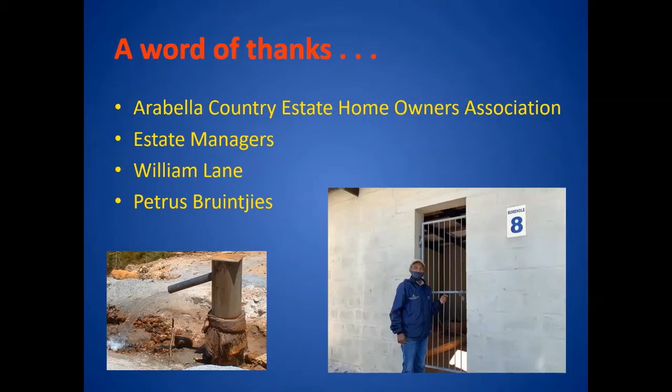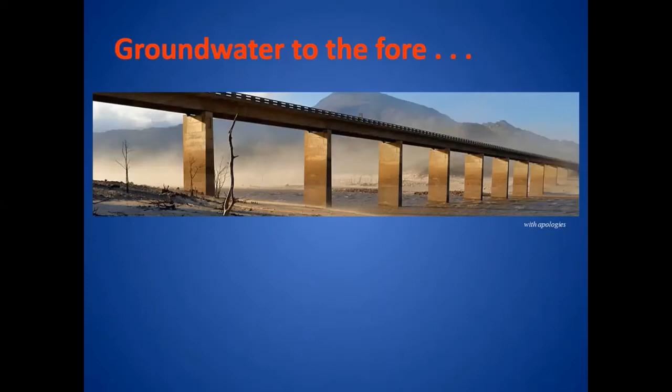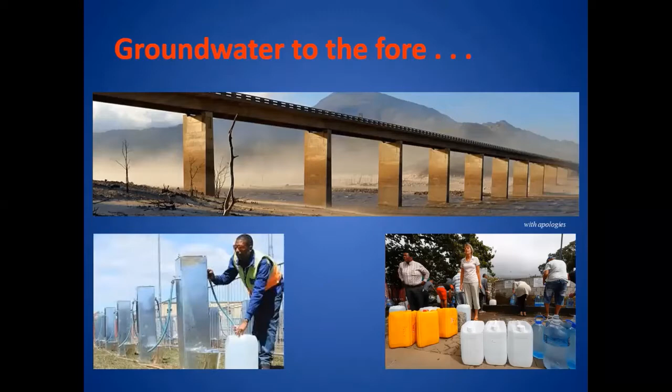This is a picture that many of you will be familiar with, but it's slowly starting to recede in our minds that not that long ago, Theewaterskloof Dam was operating at somewhere around about 13%. Cape Town was about to go into a day zero scenario. So groundwater came to the fore, and it was on everyone's lips. We were starting to think about, well, how is the population of Cape Town going to be supplied with water, and the city was talking about pods, and we had to go and fetch water in buckets and barrels and containers. And so groundwater is very much at the forefront. During that time, though, there was a lot of negative comment about groundwater, how it's an unsustainable resource and it's badly managed and so on.

And I hope what I can do today is demonstrate to you that that's not true. I'd like to put forward Arabella as a case study of where things can be done properly and where the groundwater resources can be used sustainably to the benefit of a whole lot of people.

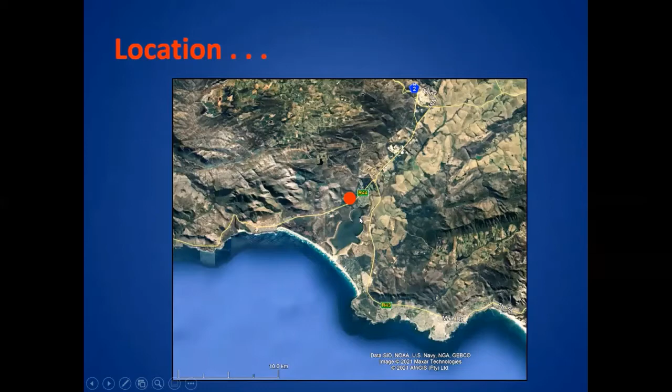So to give us a location, Arabella Country Estate is located at the end of the R44 to the east of Kleinmond, which is situated here, and to the west of Hermanus. It's located in this valley, the Bot River Valley, and this is the Bot River Lagoon that many of us drive past all the time.

And it's always amazed me how people see things differently. As a hydrogeologist, I love seeing geology, I love seeing rocks, I love seeing water and these kind of things. But other people have the vision to see a derelict piece of land and change it into this wonderful oasis. It wasn't a smooth process.

There were a couple of developers that were involved, and every so often the people we were dealing with would change, or the name of the development would change. I think it started out as Laughing Waters, then it moved on to Hermanus River Country Estate, I think, and it's been quite stable at Arabella Country Estate for the last while.

And Arabella Country Estate contains three different components. One, it's the hotel. Two, it's the golf course, and three, it's the residents that have houses in the estate. But they operate and are supplied with water from the same source.

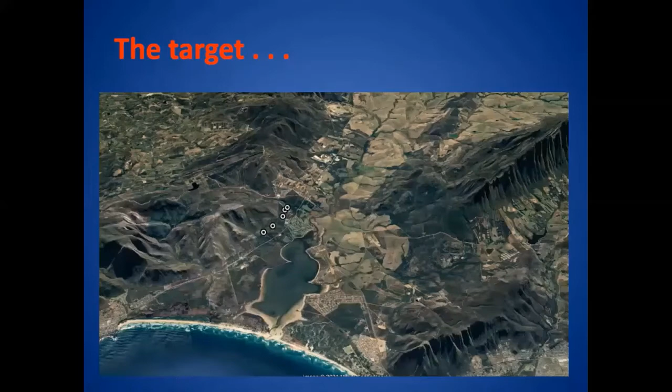All right. So what was the hydrogeological target that we were after? What I've got here is an oblique satellite image from Google Earth, where I've put in the production boreholes so that we can see exactly where we are. But if you let your mind go a little bit, you can see the ridge on the western side, and you can see the ridge on the eastern side. And you'll notice that there's very little agricultural activity on what I will show you is the Table Mountain Group.

So over that image, I draped the 1 to 250,000 geological map. And the key feature that we see is this major fault that runs here, and that is the western limb. And we see another major fault system that runs over here on the eastern side. So outside of the valley, we have Table Mountain Group, and on the inside of the valley, we have Bokkeveld. And the agricultural practice is all on the softer, more erodible and soil-rich Bokkeveld, where the water is stored in the harder, very competent quartzites of the Table Mountain Group.

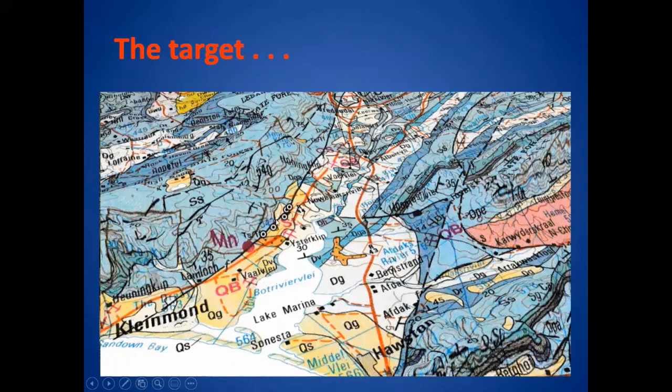So here the target that we have is this fault on the western limb of what is really a classic horst and graben structure, and we're dealing with the Skurweberg. The Skurweberg generally doesn't have a good reputation, with the idea that it's iron rich, but in recent times, more and more groundwater has been developed out of this formation, and we're learning to deal with the iron that it does contain.

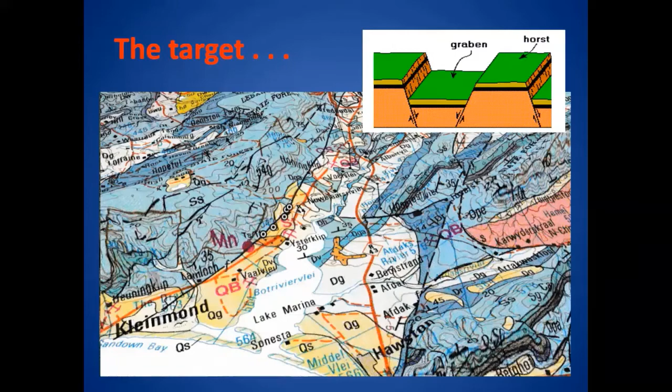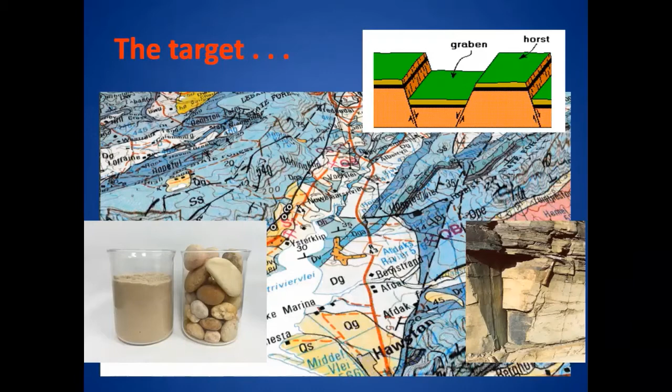Right, so just to remind us that we're not dealing with a primary aquifer system. The primary aquifer system is where water moves between the individual sand grains or cobbles or whatever, but there's no secondary processes that are required to enhance the hydrogeological properties. In this instance, we're dealing with a fractured rock aquifer, where the water moves in openings created by some sort of secondary process. In this case, faulting, but it could also be folding, it could be bedding planes, it could be weathering and so on. But here we're dealing specifically with a fault.

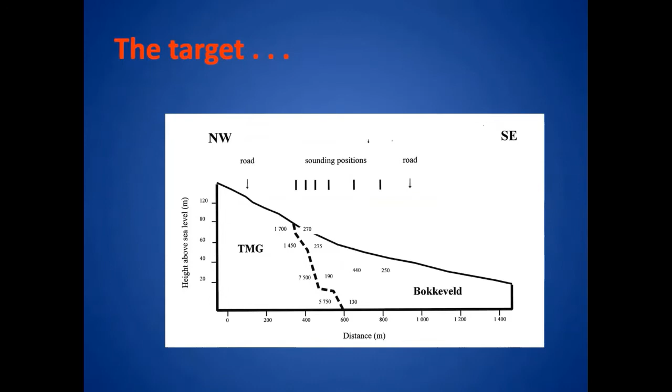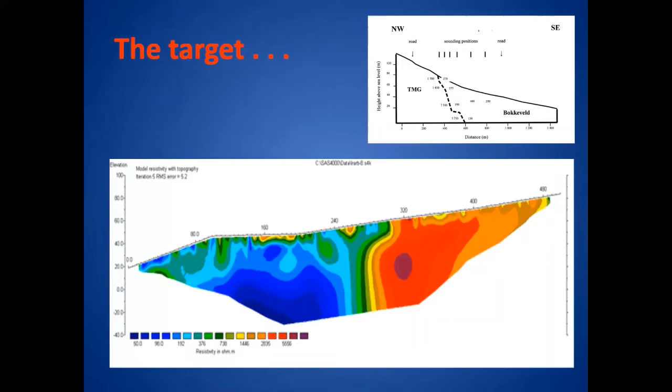But this feels a little bit like it was back in the day, because since then we've moved on to much fancier, much quicker, much better resistivity tools. So this is a traverse that is produced from a multi-electrode Lund system, and we've been using these quite routinely across Arabella to try and pinpoint the fault as our exploration grew, to get more and more water for the facility and to improve their water security.

And because of that contrast, we were quite easily able to map the fault. And we also started targeting some fracture zones that came off the fault system. And you'll see that almost all of the production boreholes target the fault. And then we went off the range on 2 occasions to drill this borehole and this borehole, which I'll explain in a moment.

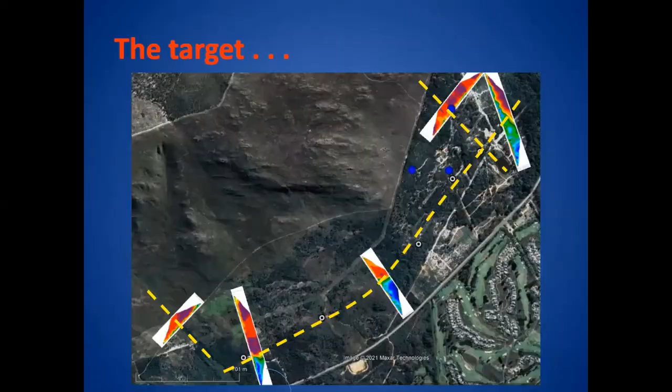All right, so the first exploration borehole was drilled in 1997. It was driven by Dr. John McStay of GIBB Africa, or whichever version it was at that stage. And he, using Fairbrother Drilling Company, put down 2 boreholes. They were quite shallow boreholes, and they were able to show that there's good groundwater resources to be had out of that fault system.

The boreholes weren't very well constructed, and we did some pump tests on them that showed that there were quite a lot of losses because of this construction. But they were the start of the process of developing a water supply for Arabella.

In 1998, we sited the first two boreholes, borehole LLBH3 and LLBH4, and from now on I'll just talk about borehole 1, 2, 3. I'll drop the LL. LL stands for Laughing Waters, which is the name of the farm. We drilled these boreholes down to about 100 meters, and both of them were what I term very high yielding, 15 to 20 liters a second.

Because we were dealing with an estate that was quite remote and didn't have any backup water supplies, the first two production boreholes that we drilled were both fitted with PVC casing with 1 millimeter slots, as shown here in the picture, and then backfilled with quite a coarse gravel. And we did this to make sure that the boreholes didn't collapse on us at some point in the future.

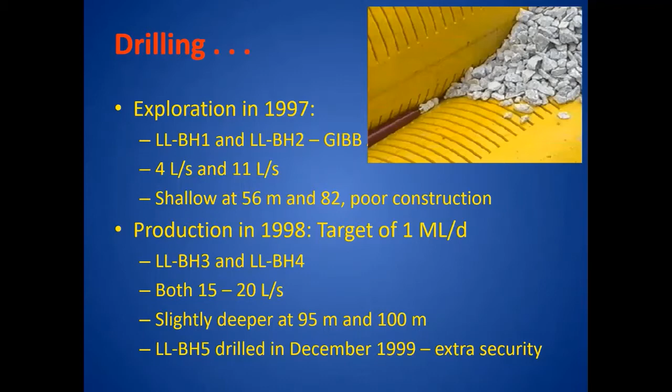And we wanted the borehole to be quite close, because one of the big expenses of any groundwater scheme is not really the drilling, but it's the pipeline and getting electricity to those points. So we drilled this fairly close. It wasn't a particularly outstanding borehole, but it was certainly good enough to make a contribution to the estate's water supply. We had two further drilling exercises.

In 2003, we drilled another two boreholes, drilling borehole 6 and 7. Again, they were quite nice yields at about 10 liters a second. These ones we pushed to a much greater depth, 220 to 255 meters. And I remember sitting in my office in Somerset West at that stage, and it was just when cell phones were becoming quite the norm.

And clearing my desk when we were down at 250 meters and we still hadn't got a water strike, and really starting to get worried, because our clients were quite demanding and they were quite precise. And when you've spent that amount of money and you haven't got them water, and you say, oh, we know what's going on, it was quite nerve-wracking. But fortunately, at 255 meters, we got a strike of about 10 liters a second, and the day was saved.

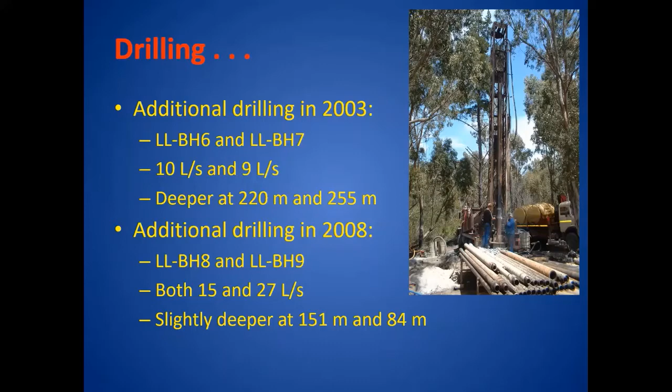And then again in 2008, we drilled another two. So all of these boreholes that we were drilling was about ensuring that Arabella had the water security that our client wanted. So what we've landed up with now is a series of 5 production boreholes. Those are the ones that are marked in red. And we've got 4 other boreholes, 3 of which we monitor very closely.

Borehole 8 used to be in production, but we've taken that out of production because of iron biofouling issues. And borehole 5 we've also taken out of production because once we drilled borehole 6, 7, 8, and 9, it was felt that borehole 5 was very low yielding and we didn't need it. But it is available if we need to bring it back in production for whatever reason. So what you see there is the Arabella well field, and that is what keeps the 3 entities in water after it's been treated.

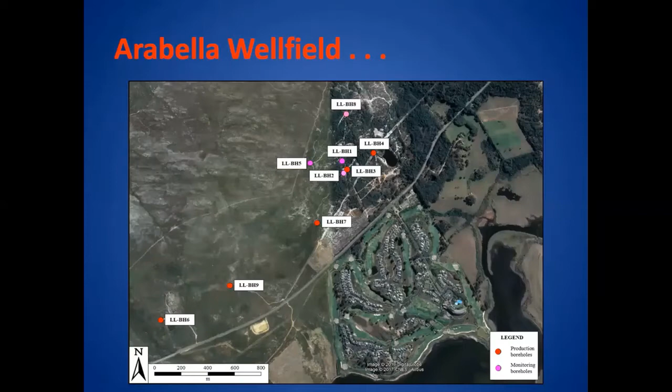One of the big challenges that we have at Arabella is the quality of the water. So the water, you'll see just now, is quite acidic, somewhere between pH 4 and 6. The salinity is very good. It's very, very nice water, but it has this high iron and manganese content. So some of the iron concentrations that we've measured in the past go up to 30 milligrams per liter. And if you remember that you can taste iron when it's above 0.3 milligrams per liter, that's 2 orders of magnitude more than when you can start tasting it. That's some of the highest iron concentrations I've come across.

It's quite interesting though, the picture on the left is in about 2002, soon after Arabella had started, we pulled the pumps out of boreholes 3 and 4 to check for iron biofouling, and we didn't find any. That pipe there is pretty darn clean. Yet the 2 pictures in the middle and on the right point to a very high iron content, where the iron is oxidized and it comes out as a very brown color and it coats the inside of the pipe. So this is one of the challenges that had to be dealt with.

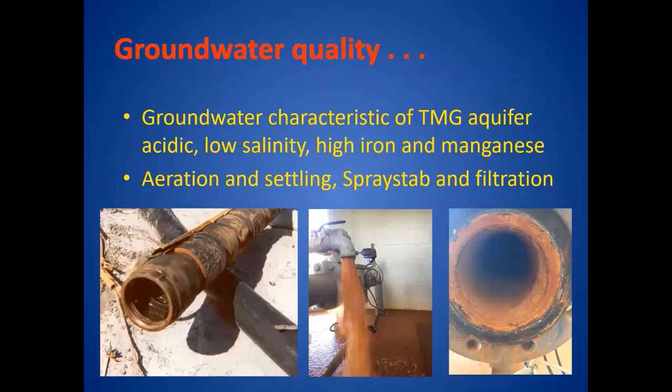So GIBB Africa had a specialist on their team, and they developed a treatment process where there's aeration and settling. It then went through a Spraystab system, and then is filtered. And they are able to get the iron concentration down to 0.1 milligrams per liter, so that it doesn't affect the taste of the water or any of the infrastructure.

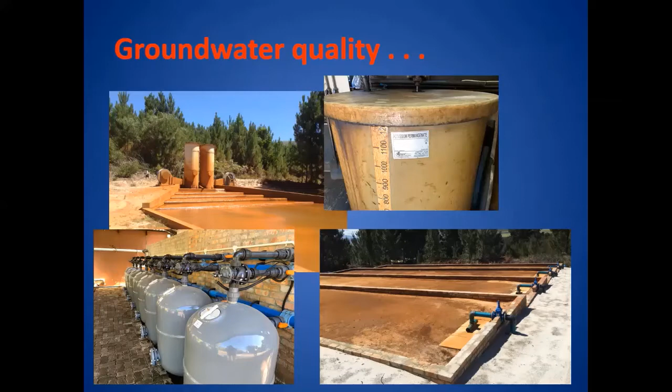It was quite amusing though that we had to jump through a few hoops, because while we were developing this in the early stages, when Arabella was just brought online, they issue these wonderful white robes and white slippers and things. And the first time they went to the laundry, they came back brown. So the poor engineer had to spring into action and make sure that his treatment process worked. But he was able to do that, and the system has worked well since that early hiccup.

What the iron does do, though, is that it creates big problems for the borehole and the borehole pump. So this is a slide of when we took the pump out of borehole 8, and you'll see all that residue and iron deposits around the borehole, and that gets into the impellers and it damages the pumps. The pumps don't last very long.

We do have the ability to get in there and clean the boreholes. It's quite a manual process. We do it with washing with an acid. We then physically go and scrub the boreholes. We do high pressure jetting, and you'll see that we can go from the situation that we have in the left there to the situation in the right. But what we do know is that it slowly comes back. So this is an ongoing challenge.

And just this morning, I had a talk to William Lane, and one of the boreholes has to be put through a borehole rehabilitation process, and the wet end of the pump, the impeller parts, need to be replaced, so to bring this borehole back into production.

But I'm not fully on top of why we get this biofouling, because in actual fact we've only found it in 3 of the boreholes. The other boreholes haven't shown the same sign. So why are we getting it in some boreholes and not the other? The wisdom is that we should pump the boreholes carefully and not induce oxygen to promote the oxidization of the iron. But that doesn't really work, because the boreholes are treated in the same way, they're managed in the same way. So there's room for learning to be done here to understand this better.

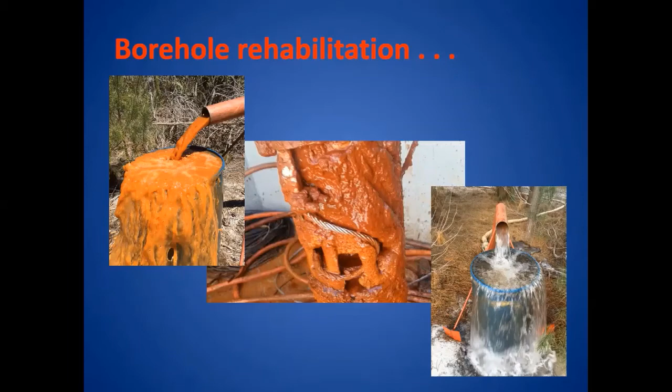All right, so in terms of the volumes that we pump at Arabella, initially we were allowed to pump 293,000 meters cubed per annum, which for many of you is just a number, but 293,000 is what Water Affairs said we could do. We initially started pumping just boreholes 3 and 4. We started at 15 liters a second, and we could quite quickly see with the monitoring that we were doing that was a little bit too much, and we reduced it down to 10 liters a second.

That pumping rate was driven by what rate the water treatment plant can operate. So one of the management criteria that we have is to make sure that whichever boreholes we're using at any one time have the ability to produce either 36 or 54 meters cubed per hour, and that's the rate of the treatment process.

In the early days, the owners of Arabella, so we'd gone from the developers now to the owners who were bringing it into implementation, the idea of worrying about groundwater monitoring and water supply was not high on their agenda. They were far more interested in the type of carpets and the quality of the food and the training. So we struggled to get a proper monitoring and management system into place.

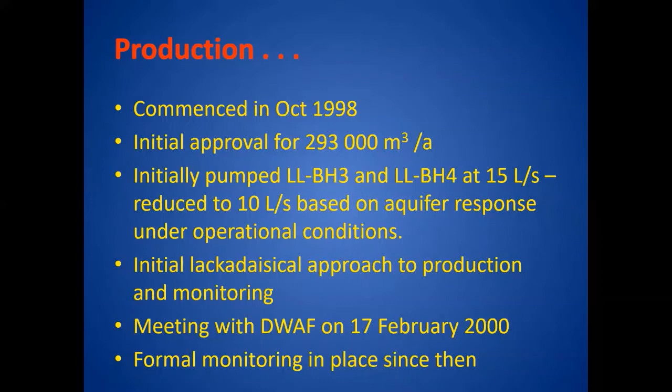They were just simply showing that the monitoring and management of their groundwater scheme was just part of the cost of doing business. But that philosophy has changed quite dramatically, in that I now have to go and report to the Homeowners Association on an annual basis on the status of their aquifer and their water supply. And they now fully understand that their investment is totally reliant on the groundwater out of these boreholes, and things have gone along much better since then.

Because of a concern about the volume of water and us getting it wrong in the beginning about how much we needed at what time, the application was made to increase the volume from 293,000 to 350,000. And we now have approval to supply 350,000 cubic meters per annum from the boreholes.

One of the cleverest things I ever did is when we got the letter from the Department of Water Affairs confirming that, I've kept it in my safe ever since. And every couple of years I get, Roger, do you know where that piece of paper is? Because having a license out of the Department of Water and Sanitation is like gold dust.

The water supply was then also supplemented with dam water that was used for irrigation, and some of the effluent is recycled and also used for golf course irrigation. In the beginning, there was very little use during winter because there were few houses and the occupancy of the hotel was low. But most of the water was used for irrigation.

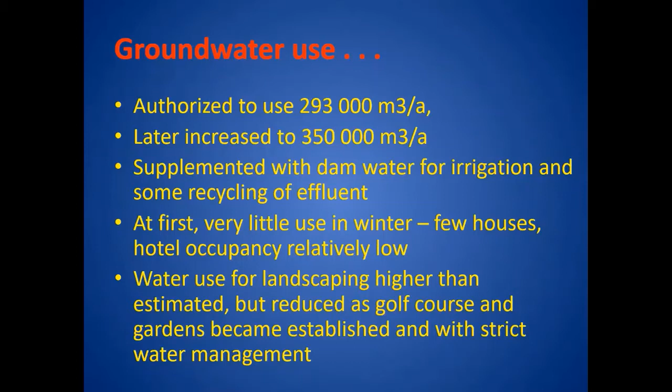I'm very lucky in that William takes his job very seriously. They measure the borehole flow meters on a daily basis. At the moment, we visit the site every 4 months. It started that we were visiting it on a monthly basis, but as we've got more and more data, and as we understood the aquifer more and understood the water patterns more, there's been less and less of a demand for us to go into site. We also have data loggers, which I'll talk to you about in a moment, that collect data in our absence.

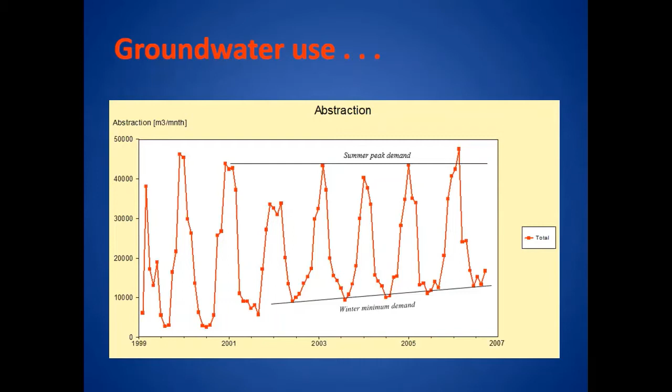Now we're really more interested in understanding the pattern of how those boreholes are used. So we have 2 major boreholes, 3 and 4. They remain the backbone, and they're the workhorses. These are the two boreholes that supply water in the summer months when the demand is high. They're sometimes backed up by the smaller boreholes.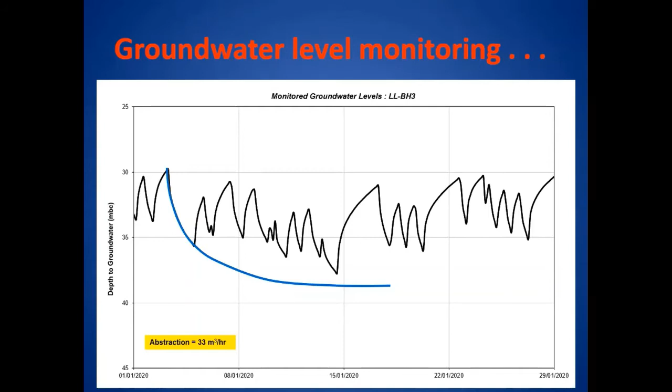So this is a layout of the management plan that we have for Arabella, where we run borehole 3 for a month in summer, and we run borehole 4, and boreholes 6 and 7 act as backups if it's needed. And we alternate that throughout the summer, and we can see on the groundwater level graph that's how it has been working. And then in winter, we turn off boreholes 3 and 4, and we then revert to borehole 9, as I explained just now.

What is very interesting for me is that, you know, I lay out these things and I think about the way we would like them to be and what the ideal would be. And often the borehole that is being used is driven by whether Petrus is on duty or not. Now, Petrus doesn't have a driving license, so he can't get to borehole 6 to manage it. So if he's on duty on a weekend or there isn't a driver available, borehole 6 can't be used, and they have to use one of the other boreholes.

It's for me just quite an amusing way, is that sometimes we think we know things and we want things done the way we want them done, but real life doesn't allow us to behave like that all the time. I must admit, though, that William works very hard to follow this plan, and by and large he gets it spot on.

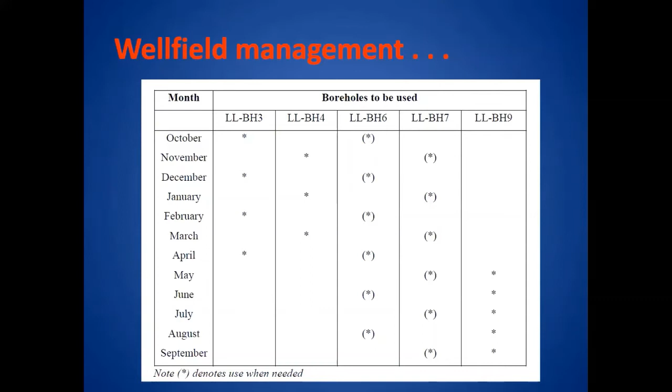What I'd like to share with you now is 3 little bits of things that I've learned in my 20 years of working at Arabella. And the first one revolves around borehole yields. So the way we would typically get our first indication of how strong a borehole is, is what we call the blow yield. When we drill a borehole, we pump air down into the hole, and that drives the hammer. But that air that goes down also brings out the cuttings and brings out the water. Now, I know I'm telling most of you things that you know so much about you've already forgotten, but that blow yield is our first indication.

And in a fractured environment like this, you know, we got pretty impressive blow yields. When we started testing them, specifically when we did a constant discharge test on borehole 3 and the step drawdown test on borehole 4, they were supporting that information that these 2 boreholes could be pumped at about 25 liters a second. But once we brought those 2 boreholes into production, we soon learned that, oh no, this is a bit high. The boreholes can't produce that, and we need to drop the production rate down to about 10 liters a second.

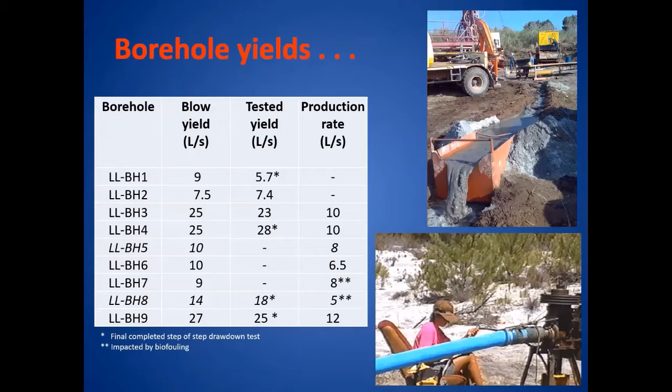Right. The second learning point that I've taken out of my time at Arabella is we always get asked, well, how much does the aquifer produce? How much can you get out of the aquifer? And it's actually quite a difficult ask to confirm what the sustainable yield of an aquifer is. So Arabella is an interesting one.

If you take the fault, the western limb of that horst and graben structure, it almost acts as a long pipeline that water from the surrounding rock can drain into, and then it can move quickly into the fault, and then is transmitted quite quickly. So working out exactly where the aquifer is and how big it is is quite a challenging task.

But what we see in monitoring the groundwater levels in borehole 5, when it's only been used as a monitoring borehole, is that there isn't a declining trend, but there are different levels. And if you look at the rainfall pattern in these gray bars, when the rainfall is high, you seem to have one level. When we have a lower rainfall, it seems to drop to another level.

When the rainfall goes back above average, it recovers almost instantaneously, and by the end of that winter, it's back to its winter high. And then you'll see this lower level here for the last 5 years, where we've been impacted by the drought that's affected the whole of the Western Cape.

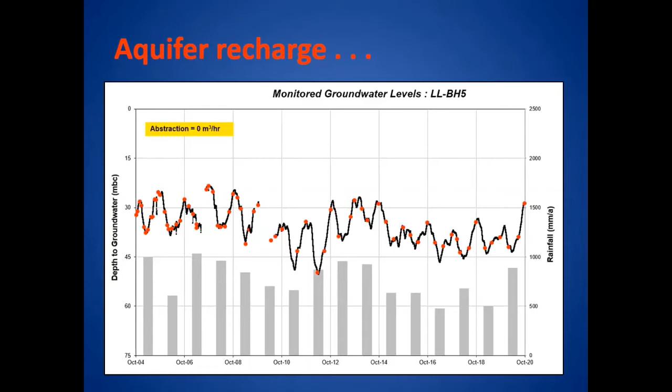And this relationship between the water level and the rainfall reminded me of some work that a former mentor of mine, Dr. Koch at the Department of Water Affairs, did. He used to draw these graphs on spring flow, relating rainfall to spring flow. And so I said, okay, well, let me try this graph on rainfall to the end of the winter recharge period water high level. So the highest water level we recorded.

And I got this surprisingly very, very good relationship that now starts to allow us to see where the water level should be based on rainfall. And if the groundwater started to be used unsustainably, we would expect the relationship to start drifting away from what we see here.

And the only way I can explain this is that 2006 was a once-off period of very low rainfall, and we still had a hangover from the previous good recharge periods. And the winter high that we observed in 2006 hadn't been affected by that single event of low rainfall.

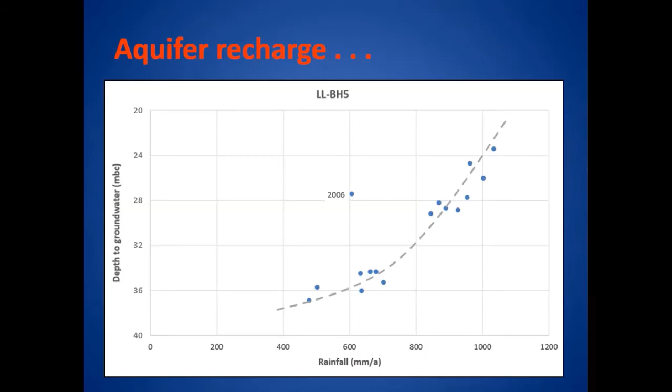The third issue that I can share is we've got an extraordinary amount of water quality data. We don't do full analyses, but every time we go and visit Arabella, we measure the pH, the electrical conductivity, the sulfate, the iron, and the manganese. And we can see these patterns. What we definitely don't see is a deteriorating water quality.

We do see an increase in variability, particularly when it comes to borehole 9, and borehole 4 also shows a degree of variability, particularly in the pH. The EC variability is a real significant variability, in that it goes from somewhere around 20 millisiemens per meter, which is as good as any municipal water supply you'll get. And borehole 9 fluctuates quite a lot, sometimes going up to 35, but that variability is not something that you would taste unless you were a very discerning taster.

More importantly is looking at the iron and manganese, and we do see a couple of peaks. You'll see there at one stage borehole 4 gave an iron concentration of over 30 milligrams per liter, as did borehole 7. But by and large, you almost get an impression that the iron concentration has been dropping slightly. What we definitely see during the drought from about 2017, 2018, 2019, both the iron and manganese have been more stable. They haven't jumped around as much, and they've been slightly lower.

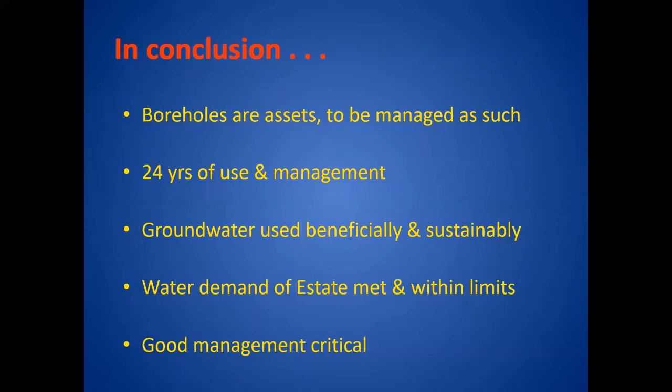It is very clear that the groundwater has been used beneficially and sustainably, and that the water demand of Arabella Estate is being met and within limits. And this all wouldn't have been able to happen if the groundwater supplies to Arabella Country Estate weren't managed in a very good manner. Right, I think that's all I have to say. Thank you very much.

Thanks, Roger. That was really excellent. And most of all, I love your very last point about management. And you know, credit to yourselves and Arabella, and credit to our Hermanus municipality. And if only that sort of approach applied to every one of our municipalities, be it Kimberley, Lichtenburg, Standerton, you know, and the list is endless. With a plan and management, those sad towns certainly shouldn't be like they are today. Anyway, that's my first takeaway, but let's have some questions from other people. Thank you.

Can I ask something? That graph of yours, Roger, of the sustainability of the 2006 outlier, made me wonder if you have a bit of a hysteresis effect, and maybe one could actually look at 2-year periods instead of just 1 year, just to try and smooth it a bit and see if you don't get more information out of it.

Thanks, Peter. That's a great idea. I'll try that, because it's always nice to have a strong relationship that comes out, but it's never nice to have the one that doesn't play ball. So I'll give that a bash later today. Okay, next person.